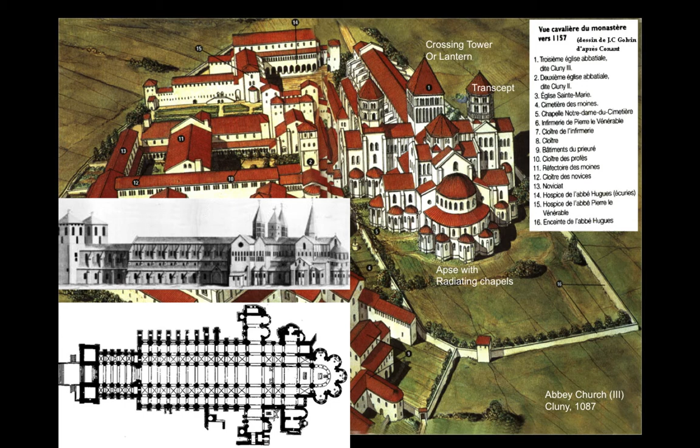But the greatest architectural crime was the almost complete demolition of the abbey at Cluny, the largest church in France and the largest church in Europe, second only to the new St. Peter's in overall size. In 1793, the abbey's extensive library, as well as its records for the past 8 centuries, were wantonly burned, an irreplaceable loss to humanity. As most churches were during the Revolution, it was vandalized and then eventually sold to 2 men who systematically demolished the building and sold its parts to build other buildings, the surviving pieces of which are now in Paris's Architectural Museum.

So with the declaration of the Republic following the Revolution, the Catholic Church in France was effectively dissolved, with the new government confiscating its land, reputed to have been 10% of the country, to pay for the new government's debts. One of the more drastic de-Christianization efforts was the adoption of the 10-day week, which over time made it almost impossible for Christians to determine when the Sunday day of worship occurred. Nonetheless, the Republic didn't need churches anymore, so they could be demolished if they were Gothic, or if they were done in a classical fashion, they could be made into museums, as we saw what was done with Saint Geneviève.

So while the English had divorced themselves from the Roman Catholic Church with Henry VIII's decree of 1534, the English had still remained faithful Christian believers, in contrast to the atheistic Republic. And therefore, while the English had abandoned the country's abbeys, they did not destroy their Gothic churches. With the fall of the Republic, Napoleon I had reinstituted the Catholic Church as a political sop to the French Catholics, but still promulgated the classical vocabulary of the Roman Empire to symbolize his reign.

But with the fall of Napoleon in 1815, the monarchy and the church had been reinstituted by the Allied powers, reversing the power structure and inviting revenge between Christians and atheists, as memories of the Republic's atrocities against French Christians were still raw. So the Gothic Revival in France actually lagged behind that in Britain by some 80 years, if we use Strawberry Hill as the start of the British Gothic Revival.

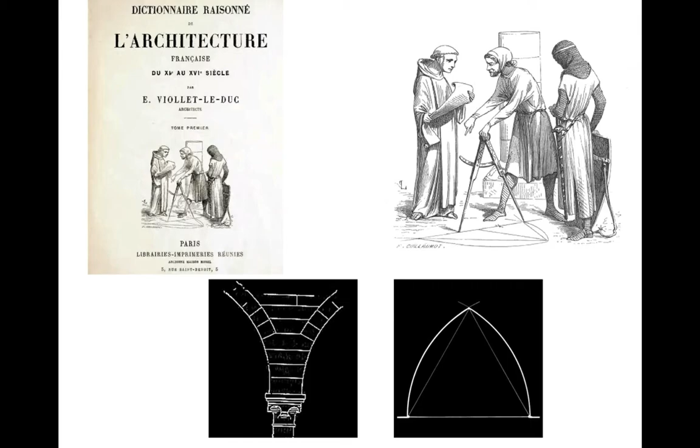The battle of the ancients versus the moderns that we saw emerge during the reign of Louis XIV had continued over the past 175 years, albeit with an ebb and flow that depended upon the point of view and abilities of those who chose to partake in it. It seemed to have finally come to a head during the Second Empire in 1863. I mentioned at the start of this lecture that Napoleon III was a shrewd politician who was very sensitive to the pulse of his subjects. While Viollet continued to restore Gothic buildings, aided undoubtedly by the patronage of the Empress, Napoleon III had continued to erect Second Empire buildings, such as the Palais d'Industrie for the 1855 World's Fair and the Opera House.

This both-and attitude of the emperor extended to French painting as well. Paris had been the scene of a biennial salon, a showing of fine art paintings since 1748. While originally sponsored by Colbert's Royal Academy of Painting and Sculpture that had been founded in 1648, following the Revolution, the Republican government had closed all of the Royal Academies, while it opened up the salons to the public.

Following the defeat of Napoleon I and the restoration of Louis XVIII, the Académie des Beaux-Arts was formed in 1816 by the merger of three of Louis XIV's former academies, the Royal Academy of Painting and Sculpture, the Academy of Music that had been founded in 1669, and the Royal Academy of Architecture, founded in 1671. It was the Fine Arts Division of the Académie des Beaux-Arts that had reinstituted the biennial salons.

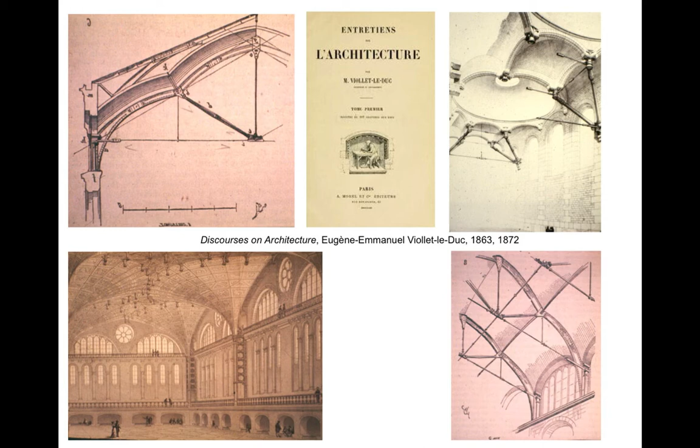He is going to argue for a 19th century architecture that is rational, that is based on a coherent system of construction and the composition influenced by, but not imitative of, Gothic. That is, quote, "Architecture should be a direct expression of current material technology and functional needs," unquote. We are going to see Viollet's writings to be more influential on the next generation than his contemporaries.

In these two volumes of discourses, Viollet begins to explore where an architect could take 19th century architecture using the new materials and new technologies to develop a modern architecture based on structural rationalism and material honesty. In other words, you should be able to develop an architecture where you utilize and express each material's inherent characteristics.

We've seen that the French have been using iron to reinforce masonry construction now for over 50 years, and that Labrouste in the Bibliothèque Sainte-Geneviève had taken it out of its masonry corset for all to see in the interior. Viollet is going to be the first French architect to propose using exposed iron on a building's exterior, as well as to actually make an architectural aesthetic out of the play of lithic stone and tensile iron.

And so what we will see Viollet proposing, albeit it is still clothed in Gothic details, and remember, change is a two-step process, is an architecture that celebrates the complementary relationship of stone in compression and iron in tension.

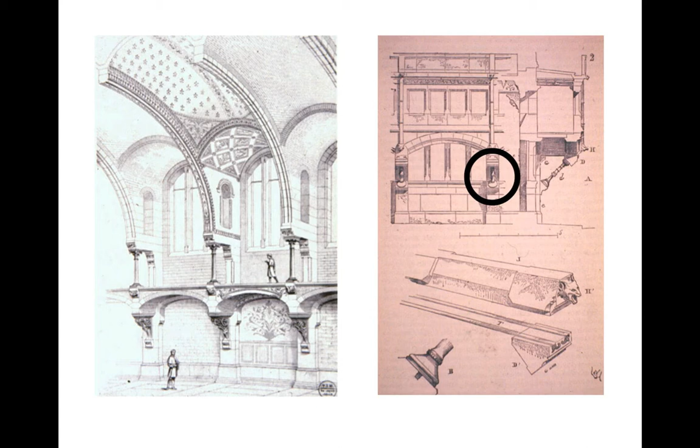You can recognize Viollet's drawings from this period by his use of one of three details. First is what is known as a dwarf column. Stone in compression wants to be as short as possible so it doesn't buckle. These will typically be supported on corbel supports. Second, he will ornament his columns with collars at their mid-height. You could ask where is the logic in this, and my only answer is that it increases the diameter in a column exactly where it first tends to buckle.

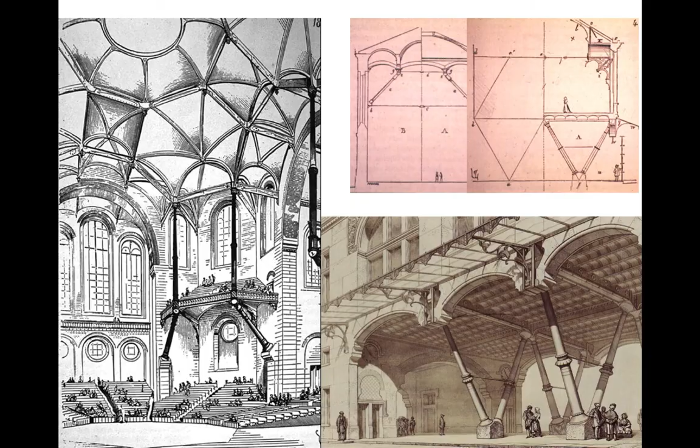And third, he will employ sloped columns. Why? A typical Gothic buttress, not the flyer, resists the thrust of the vault with sheer weight that resolves the bending in the buttress because it's a vertical element that does not have a horizontal component. But as soon as I slope the column, it has a horizontal component which rationally resolves the thrust into pure compression rather than bending, which is much more efficient and so reduces the required section of the buttress.

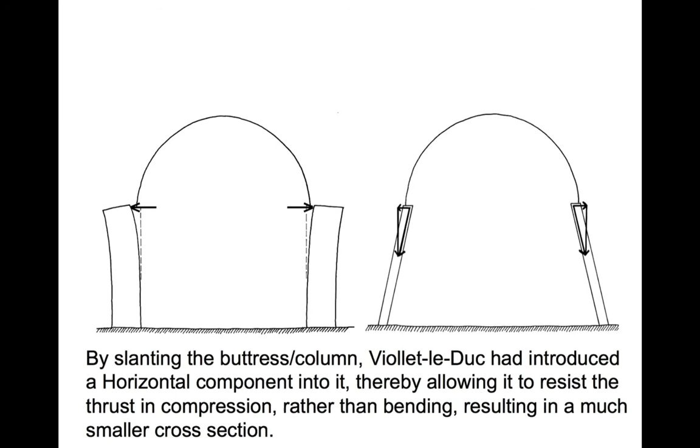In the first, the 1863 volume of Discourses, Viollet included this illustration at the last moment without any accompanying text. In the second volume of 1872, he stated that it shows an iron frame that supports a non-load-bearing glazed terracotta exterior. By 1872, this type of construction was already being used by French builders.

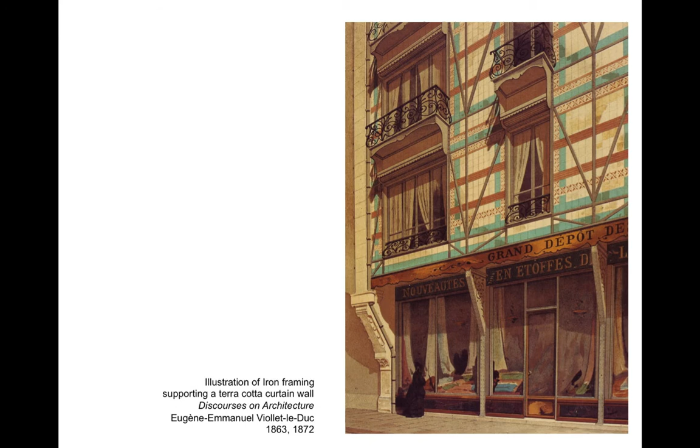And so we see the parallel evolution of this construction technique. First in the United States with Bogardus's work with the McCullough Shot Tower of 1855, which was the first example of a brick non-load-bearing curtain wall on an iron frame. And we see that the French were not that far behind in developing the independent iron-framed building, what will eventually be called skyscraper construction.

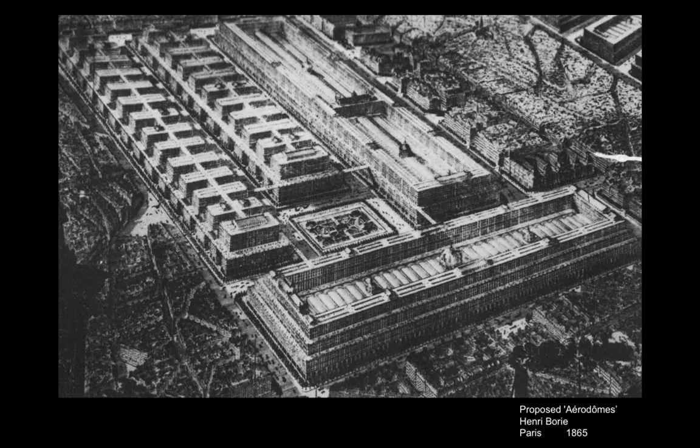In fact, in 1865, less than 2 years after Viollet had first published the iron and curtain wall illustration, engineer and social philosopher Henri-Jules Borie published his Aerodomes, an essay on a new form of dwelling, in which was contained the first design of a skyscraper that I have found. As Second Empire Paris was a model for the city of the future, it should come as no surprise that the first documented proposal to build tall, urban buildings, that is skyscrapers, was a product of Second Empire Paris, and not the United States that was still in the throes of the Civil War.

By 1865, the population of Paris was exploding. The city's population had nearly doubled during the Second Empire, as people flooded into the city from the rural countryside in search of work, made all the easier by Napoleon's growing network of railroads that converged on Paris. If one assumed that the Second Empire would simply continue on its path of social order and prosperity into the 20th century, the ballooning population of Paris would eventually have to be housed vertically, which the autocratic regime of the Second Empire could have easily decreed and financed.

Remarkably, Borie had proposed not just an individual tower, but had designed an entire utopian urban complex, similar in scale and functional organization to what the emperor had only just completed with Les Halles, one that comprised not one or two, but 25 11-story towers and two 11-story, 4-block-long courtyard monster megablocks that were linked with sky bridges, all of which he referred to as aerodomes, that is, dwellings in the air.

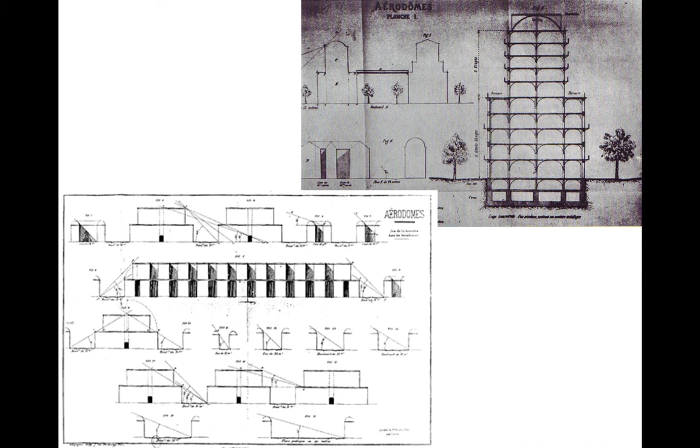Borie's towers respected the city's 20-meter height limit by carrying up the first 5 floors to the cornice limit and then placing a shallower 6-story residential tower on top of the lower tower, thereby creating a step back at the city's constant cornice height. This not only would reduce the size of the building's shadows, but also created a pleasant promenade around the tower's setbacks that provided great views to the city below and were linked to adjacent towers with glass-covered sky bridges. Ease of passage and large amounts of daylight were two of his primary concerns.

The towers were supported by iron skeletal frames that were stiffened against wind loads with portal bracing, a system of very stiff or rigid connections between the beams and the columns that imparted a rigidity to the structure that enabled it to resist wind loads, similar to how diagonal bracing works without the physical obstruction of the diagonal lines crossing at head height. This would have been completely unnecessary if the building had been constructed with traditional masonry bearing walls.

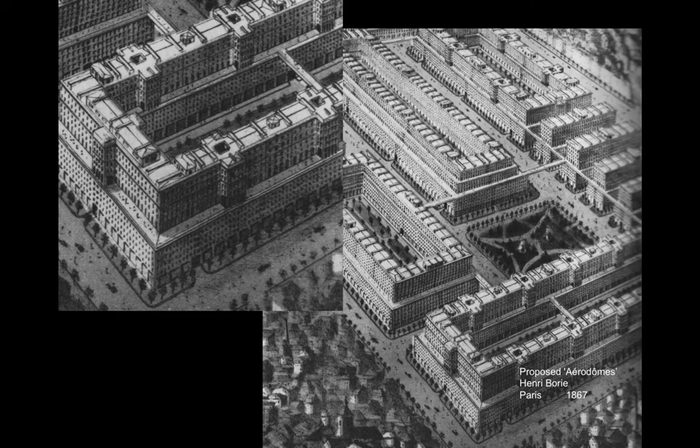Borie's utopian ideas were picked up and further refined 2 years later by Jules-Antoine Moilin, a physician specializing in respiratory ailments that were the result of the urban pollution of Second Empire Paris, who also proposed a utopian city incorporating 10-story towers in his 1869 book, Paris in the Year 2000.

Quote, "The first floor is occupied by gallery streets of unequal dimensions. On the upper floors, the model houses are divided into a multitude of rooms of various sizes, all illuminated, some overlooking the street and others the courtyard. A mechanical elevator, which goes all the way down to the cellars, permits furniture, fuel, and packages to be lifted to any floor for the benefit of people who live on the higher levels and do not like to tire themselves out."

Model houses thus rise up to a height of 10 stories. The architects proposed to take that number to 15 or even 18 in order to obtain greater economies in the cost of construction, but the government did not adopt those proposals, which would have caused the citizens to live at too great a height and obliged them to make overly difficult ascents. Finally, let us not forget to mention that all the model dwellings are linked together and to the old houses by large covered bridges and numerous footbridges, which permit circulation in all directions and at the height of every floor.

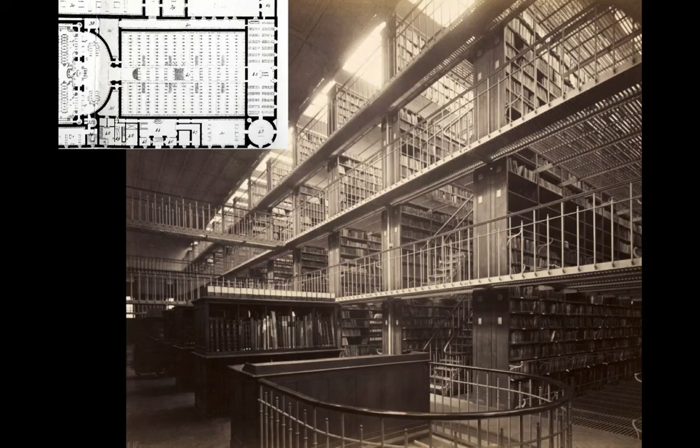But what we're really interested in from Labrouste's ideas are the book stacks that are located in back of the charge desk, because they are 4-story, all iron frame construction set within the building's masonry exterior walls. In contrast to Labrouste's contemporary, the builder Bogardus's exposed, traditionally ornamented iron members in his cast iron fronts, Labrouste's architectural sensibility allowed him to experiment with an innovative aesthetic by detailing no ornament of any kind on this exposed iron structure, giving it an appearance that still looks remarkably modern.

There are 2 reasons for the use of iron. Number 1 is that the stacks are to be fireproof. This is the National Library, and very rare books are stored here. Number 2 is we want to minimize the use of gas lighting. This still involves the use of open flames. So even the floors are made out of an iron grillwork to allow as much daylight to filter down to the lower floors as possible. When you actually look at the detailing, it looks like it could have been designed today from the standpoint of the straightforward wrought and cast iron structure.

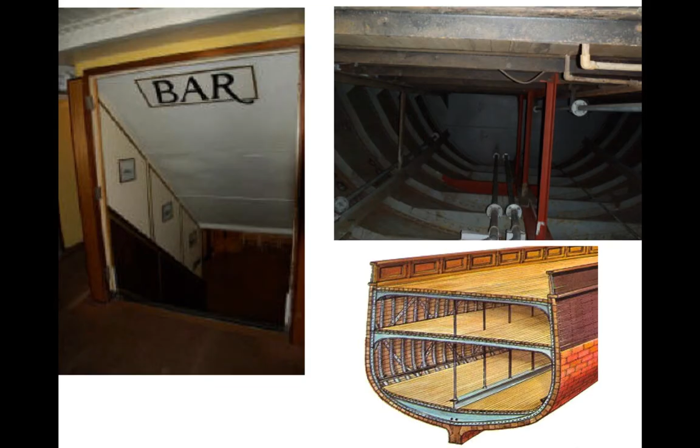It's thought that Labrouste was influenced by the first construction of iron ships that was happening at this time. In other words, we are beginning to use iron rather than wood to construct ships because it is stronger than wood. And so I think you can easily see these stacks as a type of ship construction in which we go down into the hull. This is not going to be the only time we will see naval architecture impact building architecture over the next century.

There was also a French parallel to Bogardus's precedent of supporting a masonry curtain wall on an iron frame, first tentatively done in 1855 in the McCullough Shot Tower, and then carried into a multi-story building application in the 1858 Santa Catalina warehouse. Outside of Paris, in the suburb of Saint-Ouen, a six-story warehouse for the Saint-Ouen Railway and Dock Company was constructed in 1864, only 6 years after Bogardus's Cuban warehouse was erected. The French building had 3 of its 4 exterior walls comprised of an exposed cast iron frame that supported a masonry enclosure on each level.

Designed by engineer Hippolyte Fontaine, the exterior frame consisted of cast iron columns and arched cast iron beams that bore a remarkable resemblance to the exterior of Bogardus's Havana warehouse. The interior was completely framed in iron, with cast iron columns supporting built-up wrought iron girders. The girders supported cast iron beams from which spanned flat arches made from hollow bricks.

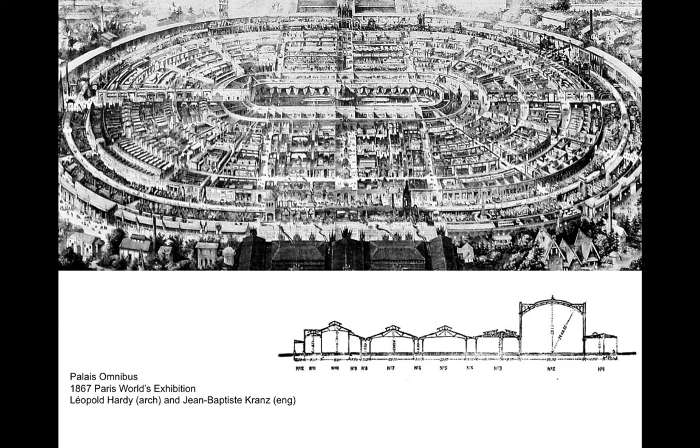Manifesting the French penchant for the classification of everything in an encyclopedic fashion, Le Play set out to design a building that allowed visitors to easily compare products from the various countries, as well as to study one country's exhibit in totality. What resulted was neither a large greenhouse, like the 1851 Crystal Palace, nor a train station, like the 1855 Paris Palais d'Industrie, but an efficient, all-iron building with little architectural pretense that contained more than twice the gallery area of the British Crystal Palace erected only 16 years earlier.

It was at 1,600 feet, however, not quite as long as the Crystal Palace's 1,850 feet, but it was much wider at 1,240 feet. It was arranged in a plan of 8 concentric rings, each dedicated to a topic, and radial spokes that housed the exhibits of one nation. Therefore, a visitor could choose to explore either a topic or a country. In many ways, it could be considered to have been Paris's first true department store.

The topics of each ring, as one worked from the exterior to the inner court, were as follows. First, a perimeter comprised of a promenade of restaurants and cafes of the world that was open until 11 p.m., even though the exhibits inside closed at 6. These comprised 7 galleries or rings: machines, raw materials, clothing, furniture, liberal arts, fine arts, and the history of work.

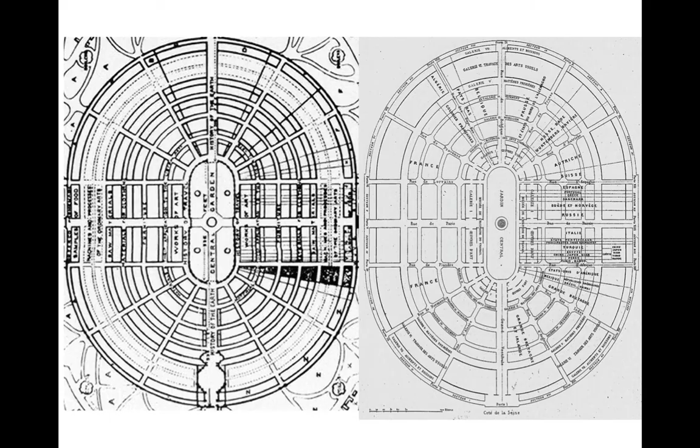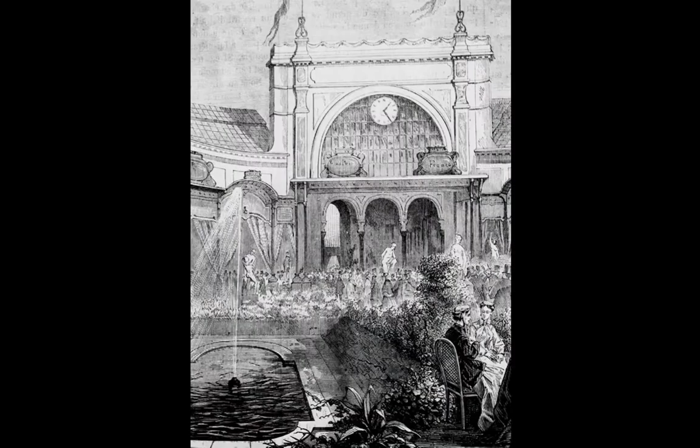Eventually one arrived at a completely enclosed courtyard, decorated with pleasant gardens and fountains. A place of pause after a hectic, almost mind-numbing couple of hours of what the future beheld. Nonetheless, the French still managed to work into this court small-scale exhibits on weights, measures, and money of the countries.

From the standpoint of architectural history, the 1867 fair may best be remembered for the first exhibits of reinforced concrete construction, such as this all-concrete house by François Coignet, as well as a number of fireproof flooring systems that employed hollow bricks of either plaster of Paris or terracotta, a technique that will slowly be adopted in the United States.

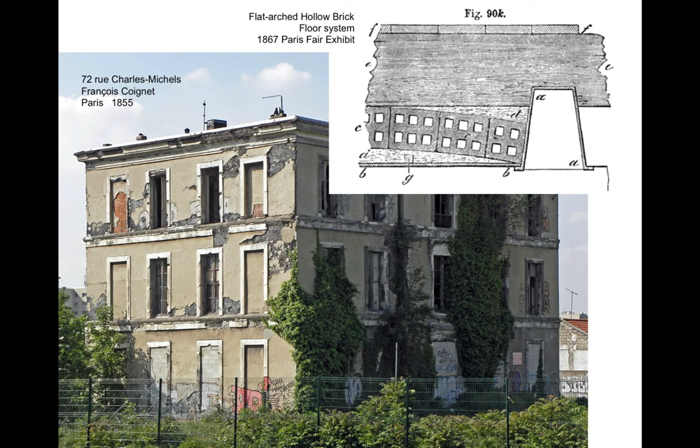The fair's most poignant exhibit was that of Prussia and the new steel guns that the armorer Krupp had just started to fabricate. Although it was stated that these were so large that they could only be used for coastal defenses, in less than 3 years their siblings would surround Paris, marking the end of the Second Empire and any dream of building a skyscraper in Paris.

For there is no doubt in my mind that the French would have built the first skyscraper in the world, and we would probably be calling them aerodomes, except for the actions of one person, and that person is Otto von Bismarck, the Chancellor of Prussia.

Remember, at the start of this lecture, I talked about two countries that were very much impacted by the 1848 revolutions. France was one, and the other one was Germany. Well, actually, I should have said Prussia, for there was no Germany yet. Not until Otto von Bismarck took over control of the Prussian government and set his sights on the unification of Germany. So how does Bismarck actually influence the history of architecture?

Over the course of my lectures, I've shown you that there was no Germany as a single governmental entity at this time. In fact, at one point, there were over 300 political units that made up the territory we now call Germany, compared to the one governmental entity that had called itself France since 843. So the main power in Central Europe actually had been Austria at this time, and it wasn't until 1701 that Prussia began as an idea.

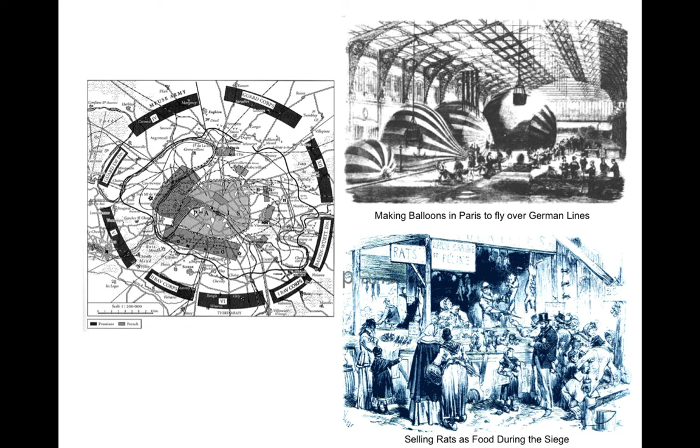Eventually, the German Kaiser gets tired of this. We've accomplished our mission. We got Bavaria to surrender its independence. We are now a country. Let's end this now. He asks Bismarck. Bismarck looks at him like, I wanted to do that 4 months ago, and agrees. Let the bombardment begin. So those huge new Krupp cannon begin shelling Paris.

The rich, the middle class, and the national government immediately got out of town. In other words, within a week, over 200,000 Parisians fled. They saw the terror of the guillotine coming once again, for this will be the 3rd time that Paris will be subjected to socialist revolt, and you would be a fool not to escape with your life while you could.

They expect the city to flare up once again, and it comes to a head a month later on March 18th, when the conservative government, that was elected by the French in the countryside, tried to secretly get the country's cannons out from the armory in Paris. The gig is up for the socialists, for they understand what the government is trying to do, and again the barricades go up.